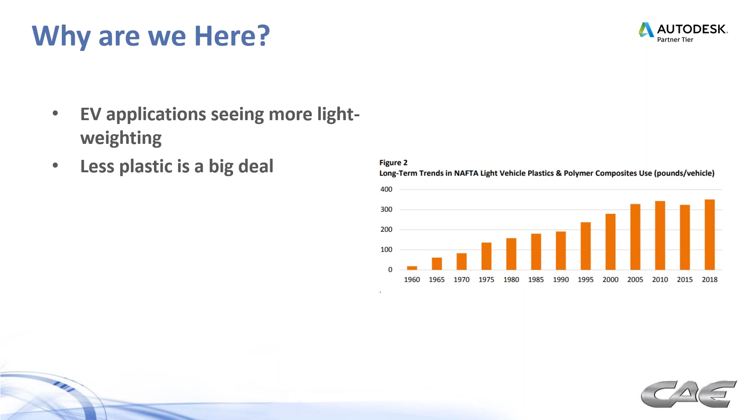You can see the chart there. Over the years, the gradual conversion from steel to plastic has taken place to get a lot of the weight out of the car just by the fact that they're switching from steel to plastic. But now we're going the route of reducing the weight of the plastic components themselves. So you can kind of see a leveling out over the last 5 to 10 years of the total number of pounds of plastic in a light vehicle.

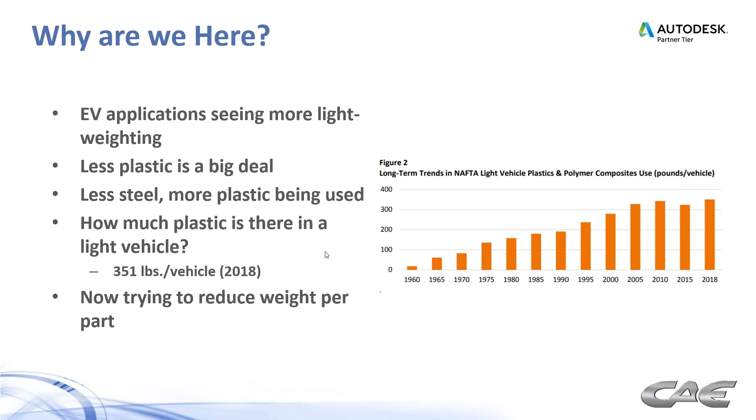But I would argue that there are a lot more plastic parts going in there, and they're being lightweighted. So the amount of plastic is leveling out, but the number of plastic parts is increasing. And so it's incumbent upon us as plastics engineers to understand what the implications of that are - how do we manufacture plastic parts, not just for the electric vehicle industry or automotive in general, but also for other types of parts as well.

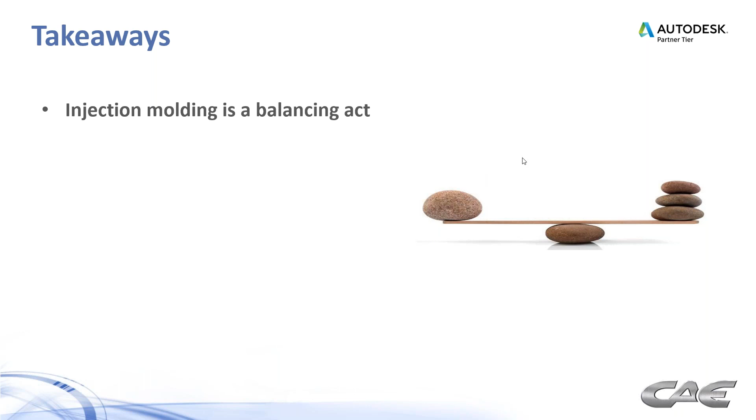So what I want you to take away today are these things here. First of all, for those of you who have been around injection molding for a while, you know injection molding is a balancing act. Whenever you try to push the envelope in one direction, there are always consequences to that. And so I'm going to point some of those things out today.

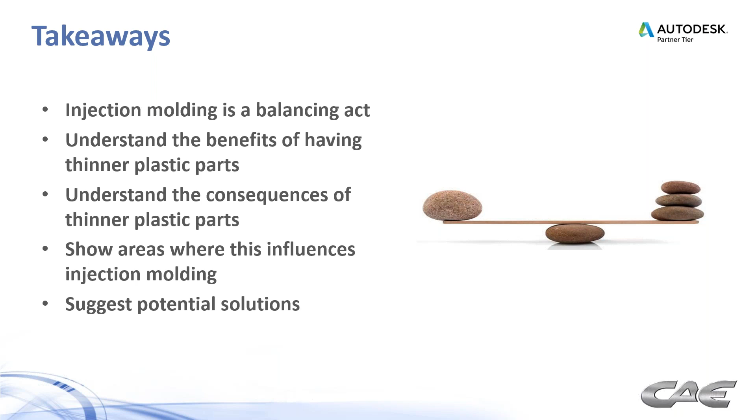So we're going to understand the benefits of having thinner plastic parts. I think some of those are pretty obvious, but we also want to understand the consequences of having thinner plastic parts. And we're going to show areas where this influences injection molding, whether it's filling, warpage, or cooling. And then we're going to suggest some potential solutions along the way for each of those areas.

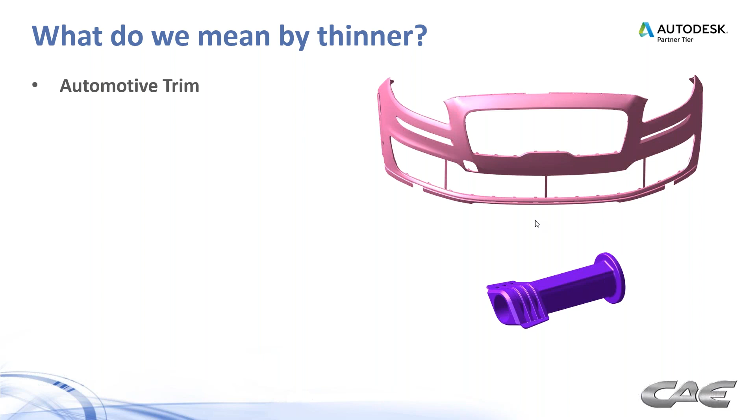So what do we mean by thinner? A lot of this depends on what type of part you're dealing with. If you're in the automotive industry, a lot of times you're dealing with big parts. So automotive trim, for example, the focus is more on efficiency and cost - you want to be able to mold parts faster, you want to reduce the amount of plastic you're using and get the cost out of these parts.

So, 10 to 15 years ago, 3 to 3.3 millimeter walls were typical for these types of parts. 5 to 10 years ago, the reduction process started, to 2.8 to 3.0 millimeters pretty typical. And now we're seeing a lot more 2.5 millimeter wall parts, for example. So the trend has been coming down, as I mentioned, with the amount of plastic that is in each light vehicle.

So again, there's going to be some consequences of getting to these thinner walls. But it's not just automotive that uses thin walls. Medical electronic packaging has been using thin walls for quite some time.

Their focus isn't so much on efficiency and cost because their parts are so small. This part on the right, for example, is only 1.5 inches long, and there's a membrane in there that's extremely thin, like 0.2 millimeters. So the focus here is more on functionality—anything goes, really.

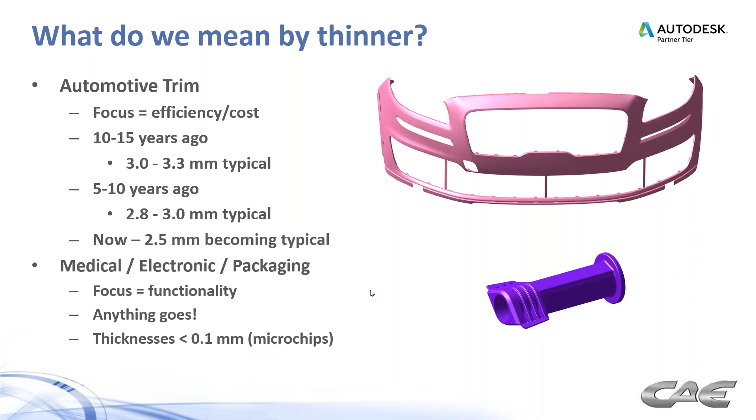It's really what matters to the functionality of the part. In some cases, we're seeing thicknesses on microchips less than 1/10 of a millimeter. They need that functionality to make their part work the way they want it to, so we have to figure out the manufacturing solution in terms of how to get it filled, how to make it work.

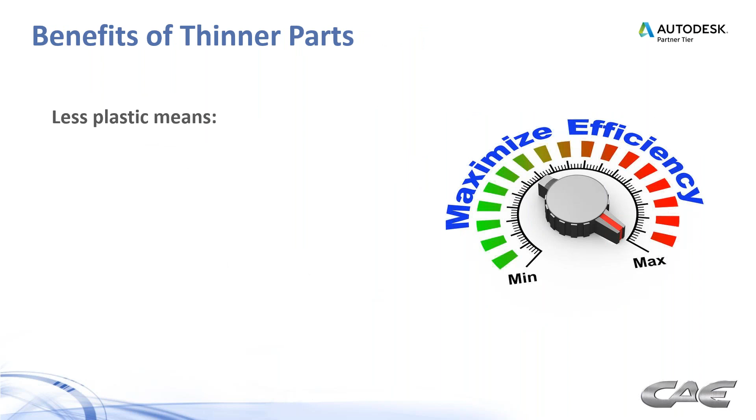And then, the benefits of having thinner parts are fairly obvious. Less plastic means reduced weight for engine efficiency, for example, and reduced energy consumption—whether it's gas on a standard combustion engine automobile, or for a fully electric vehicle, the battery efficiency. And then converting that battery energy into horsepower for the engine is important.

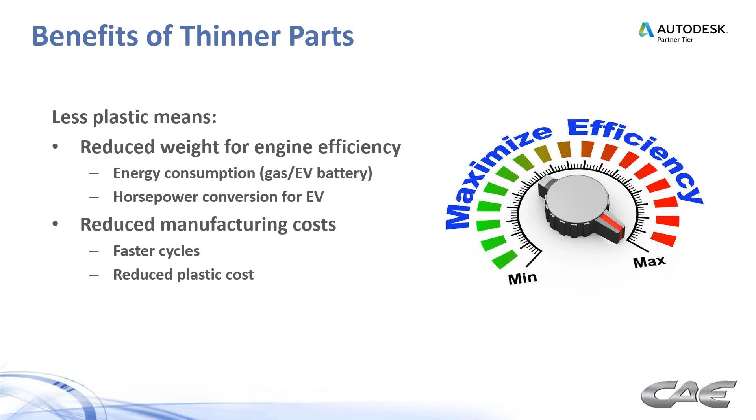And then, of course, we have reduced manufacturing costs. We have faster cycles, and reduced plastic costs in general.

But on the opposite side, plastics injection molding is a balancing act. There's a danger to going too thin with plastic, and in some cases, if you're not paying attention to what you're doing, you can get on thin ice with your boss or your company. I've seen some disasters out there that were the consequence of going too thin on a part.

So thin wall means part quality issues. You could have backfills or non-fills. You could have read-through, meaning sink marks on a show surface, for example. You could have warpage or buckling. You could have reduced part performance—thinner walls aren't as stiff, and they don't hold as much load.

You could have increased molded-in stress, which could decrease the plastic material properties that you assumed were there when you looked at the material data sheet. And of course, on the opposite side, you could have increased manufacturing costs.

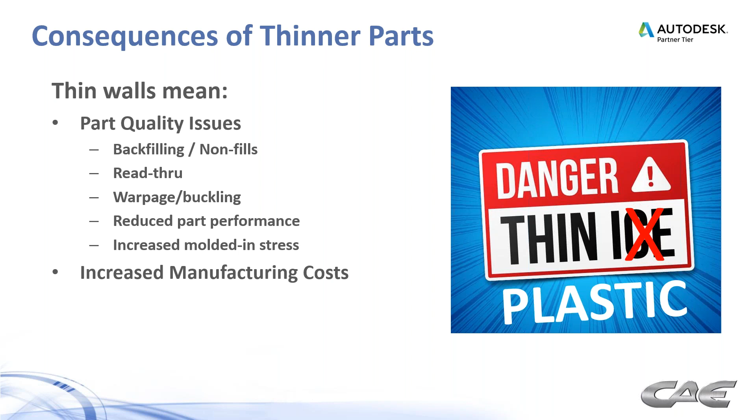It seems too simple that a reduced amount of plastic will reduce manufacturing costs from a cycle time standpoint and a less-plastic standpoint. But there are increased manufacturing costs that often go unseen, like larger molding machines. You have a thinner wall, you might have to put this in a larger molding machine to be able to hold the clamp force.

You might have a more expensive mold to build, more hot drops, for example. If you've got a valve-gated mold with a bunch of hot drops in it, every one of those drops is going to cost you thousands upon thousands of dollars. So it's a balancing act.

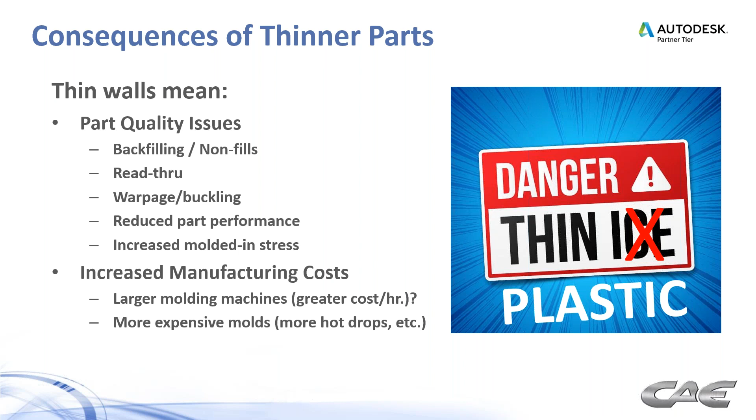So our motto here at CAE Services is predict, identify, and solve using Moldflow software.

This was a case we worked on a few years ago that was shaping up to be a bit of a disaster. I took a picture of one of these outside the window of my car one time traveling down the highway—this is a mud flap on a tractor trailer. The backstory is that some injection molding machines were purchased, millions of dollars invested for these large parts, and the first molds, or first parts off the mold, were showing a very buckled situation in that top piece there.

We'll get into this a little bit later, but they wanted a thinner wall on this top piece, and didn't consider the implications of doing that on the manufacturing side. So the customer was getting ready to pull these molds and send them elsewhere to solve the problem. But it really wasn't a molding problem so much as a part design problem. So we leveraged our knowledge in buckling and the Moldflow software to solve this problem, and we'll show that a little bit later.

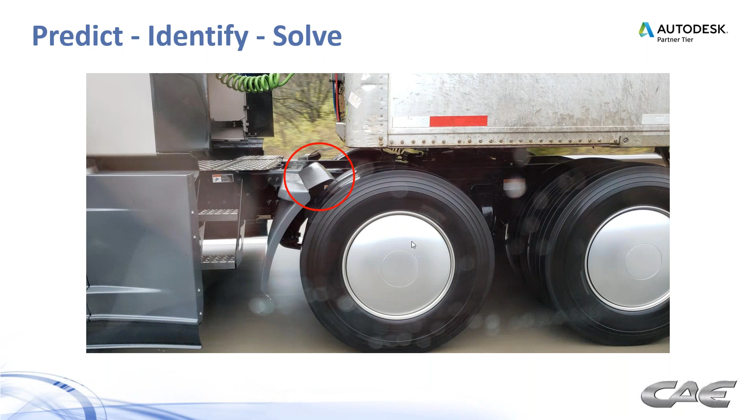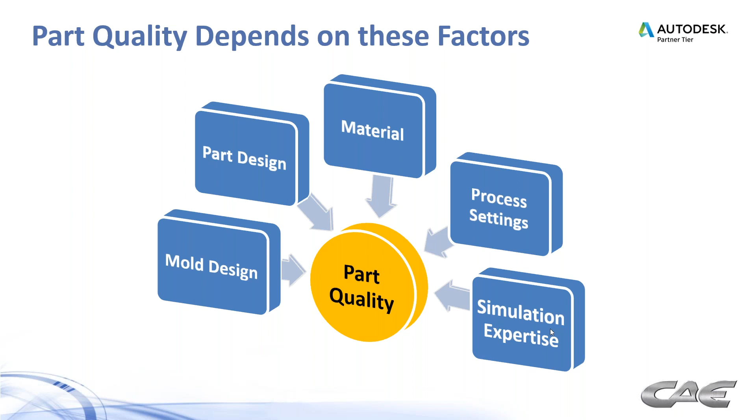So it's really a part quality issue, and in some previous webinars I've done, I approached it from a five-pronged standpoint. All of these things go into determining the part quality: the mold design, the part design, the material, the process settings, and—when we're trying to be predictive of part quality—the simulation expertise on the Moldflow side.

So we're going to get into almost a random list of things involved in thin wall applications and what we need to pay attention to. First thing we're going to get into is filling speed. This is a medical application, and they call this a cannula.

You'll see here in a second that with that thin wall, oftentimes you can get into a situation where you have an air trap. This is a thick wall versus thin wall deal, where plastic wants to go into the thicker walls, and meanwhile it hesitates as it goes into the thin wall. So what you end up with oftentimes is a backfilling condition, as we're seeing here, and also a knit line situation, which can compromise the integrity of the part. If you look at this particular piece, you see a sharp point on the end—it had to puncture another piece—and if the knit line and backfilling occur, that can compromise the structural integrity of that little cannula.

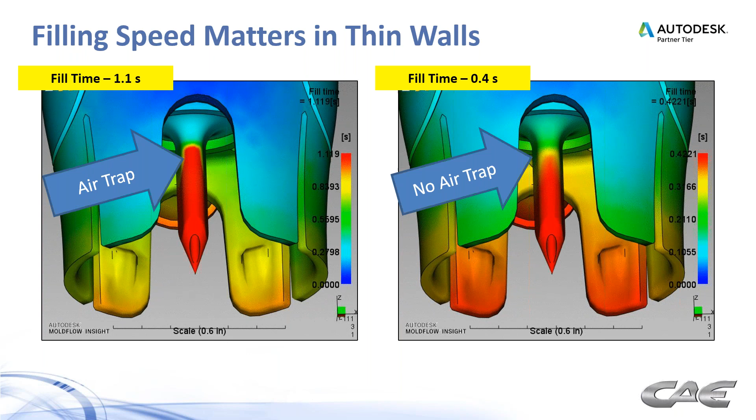One of the solutions to doing that is looking at your fill speeds. With a quicker fill speed on the right, we were able to help mitigate that a little bit. But ultimately, a better choice would have been a thicker design. We're here to talk about how to make things thinner, but sometimes, for functionality's sake, you have to find out where you can draw the line. In this case, a thicker cannula might have been a better solution, but oftentimes we can get through this by changing the process—in this case, it was a fill speed issue.

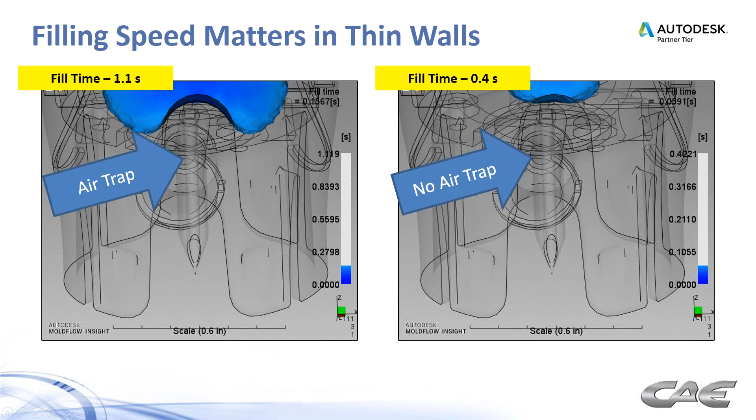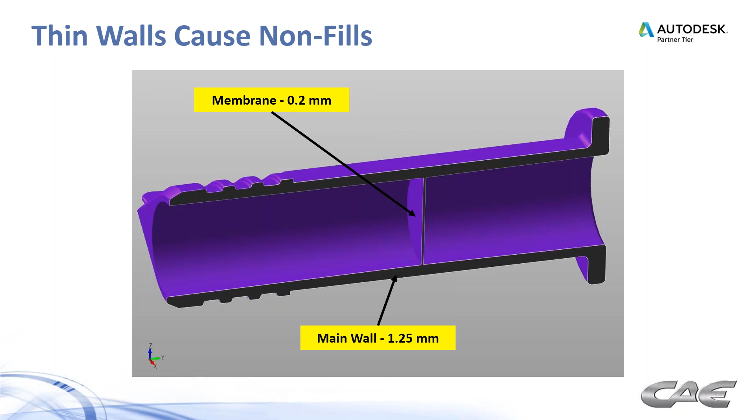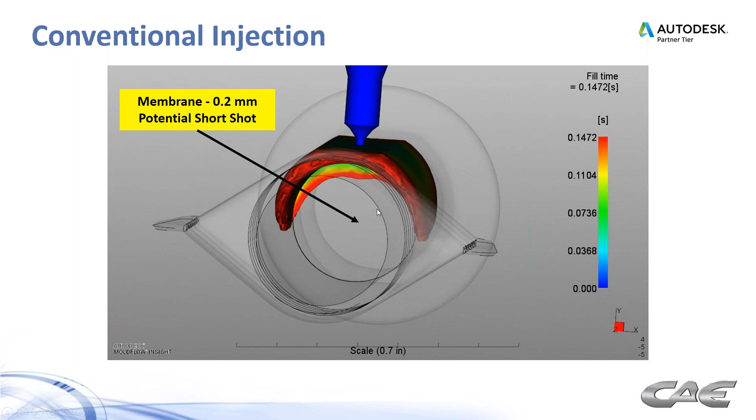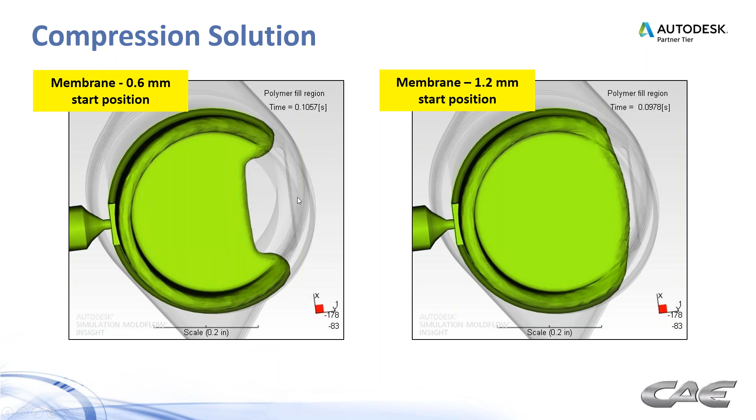So we came up with a different solution, and this was actually kind of unique in the sense that we're using compression on this. What we did is we actually pulled back the core to make its starting position thicker, and we iterated on that—we did one with a 0.6 millimeter start position and a 1.2 millimeter start position, to allow that material to shoot through the membrane without backfilling or knit lines. You'll see in a second this core will start to move. We actually have the ability to simulate that movement of the core, fill it first, and then compress it in a very short period of time so that area doesn't freeze off quickly and end up with that 0.2 millimeter membrane. A very, very unique way to achieve thinner walls. The total time to do all that, inject and compress, was on the order of 0.6 seconds.

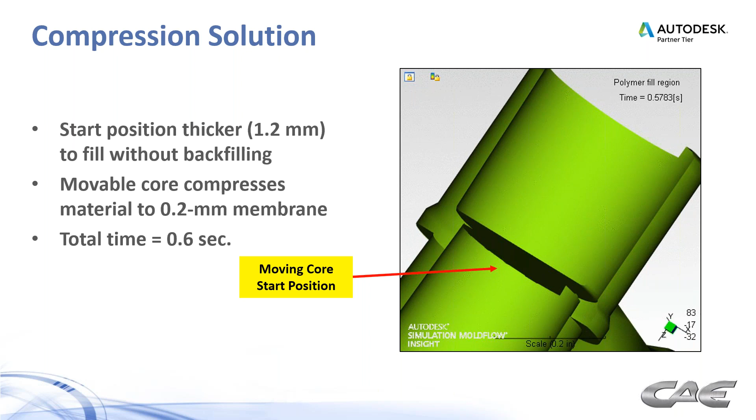One of the things you have to pay attention to when dealing with thin walls is material degradation. On this same part, if we had gone with conventional injection and were able to fill it, you see the elevated levels of stress caused by the injection process in conjunction with the thinner walls. So thinner walls means a higher amount of molded-in stress, and when you have a higher amount of molded-in stress, that's telling you the manufacturing process is affecting the part quality—it's affecting the assumptions made about material properties when you look at a material data sheet, for example.

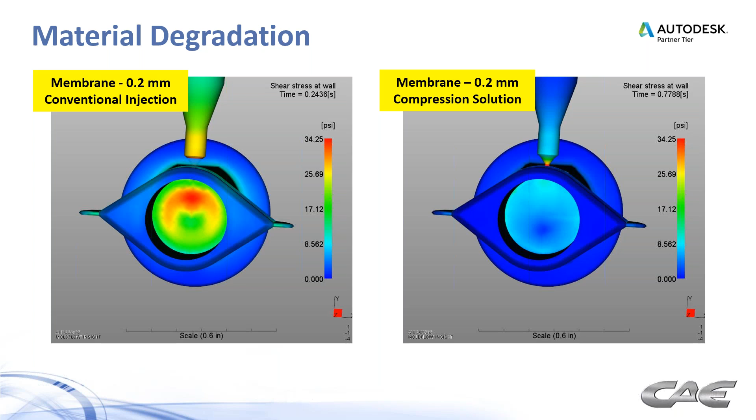This molded-in stress can actually reduce the amount of yield stress required to make a part fail in its functionality. Notice the difference here between the conventional injection and the compression solution—on the same scale, there's quite a reduction in the amount of molded-in stress in that part. It's not just this type of part; you see it in automotive parts as well. The thinner you get, especially with more amorphous type materials, the higher that molded-in stress goes. And if that part has to hold some sort of load, you may end up with quicker failure—not just because it's thinner, but also because there's a larger amount of molded-in stress there.

Okay, so that's thin walls as far as filling patterns is concerned.

Now we're going to talk about the number of gates and how it relates to pressure. Here's a bolster part that we worked on, and on the left we have a 3 millimeter wall with 3 gates. Not the best balance in the world, but it's a workable solution. 14,300 psi to fill that.

When we reduce that to 2.5 millimeter wall and using the same gating option, now our pressures are increased up to 17,000. And if we were to push that even further, now you're starting to get up close to the capabilities of the machine. 20 to 25,000 psi is pretty typical for an injection molding machine.

So with the 3 millimeter wall, with 4 gates, we were able to get it down to 12,000 psi. So this is where adding a gate gets you into a larger molding window, but now you've got the consequence of an extra gate, so that's going to cost some additional dollars in your mold design.

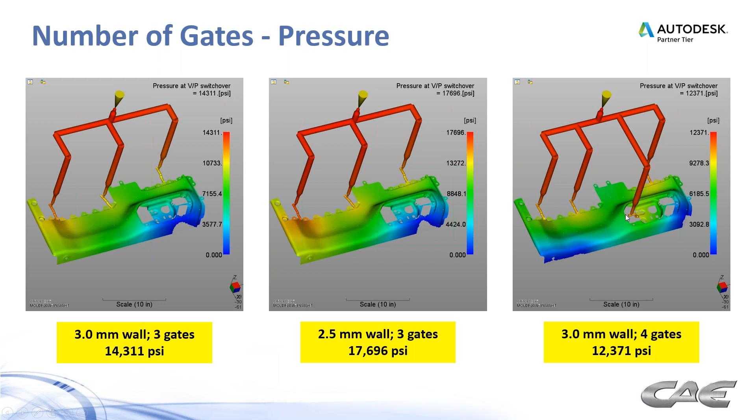Not only that, but you have to pay attention to what's going on with clamp force. So with those same 3 situations, the 3 millimeter wall with 3 gates is 1,700 tons, the 2.5 millimeter wall with 3 gates, now we're up at 2,400 tons.

So let's say you're slating this part to go into a 2,000 ton press. Well, now all of a sudden you reduce the wall thickness so much that you can't mold it in that 2,000 ton press. You have to go with a 2,500 ton press if you're going to stay with the 3 gate situation. But going to the 4 gates, we're able to get it back down to almost 1,600 tons.

So clamp force is affected because the pressure is affected. Pressure is affected because of the gating scheme. So all of these things are interconnected, and all of these things are potential problems if you're not able to simulate this ahead of time and see what you're up against.

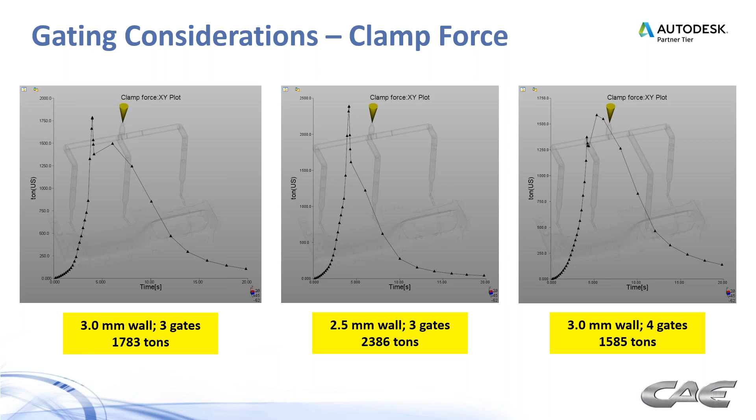Here's a chart. I did a little DOE on this part, looking at on the x-axis 5%, 15, 25, and 35% increases in wall thickness from nominal, and then down to 25% less. So you see from nominal, as you go thinner and thinner, we have an exponential increase in pressure with the thickness. It doesn't take long before this pressure starts to get out of hand.

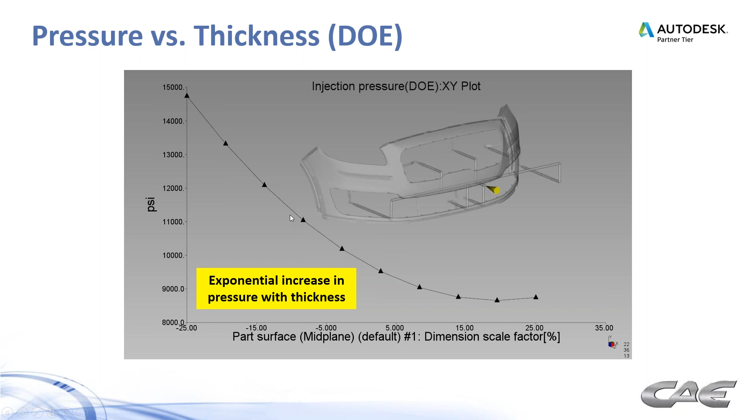Now this is a large part with a TPO type material, so pressures are generally fairly manageable. But imagine a material that's a little harder to fill. That pressure can get out of hand real quick, like polycarbonates, PC-ABS, things like that. So exponential increase in pressure with a decrease in thickness is the big message there.

On the cooling side of things, we tend to have a linear decrease in temperature with the thickness. So as those thicknesses come down, this is where we see benefits, right? And it tends to come down linearly.

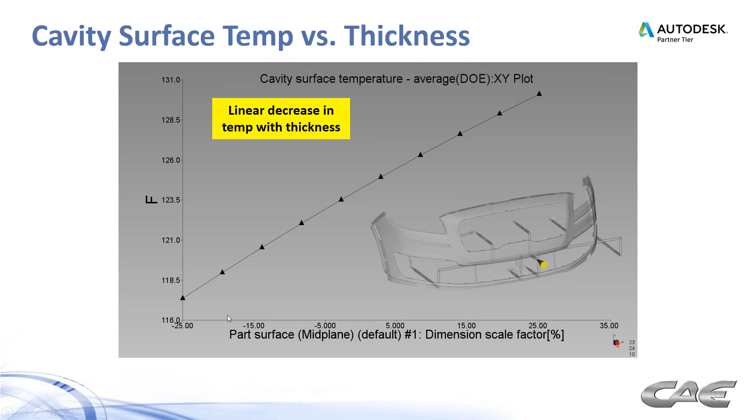And then what I found over the years is about for every degree in temperature that we reduce something, it equates to roughly about a second saving in cycle time. So that's how to look at this. So notice when we go down to like a 15% decrease in the wall thickness, we might be saving up to 5, 6, 7 degrees in temperature, which is going to equate to that 7-second cycle improvement.

To be more specific, we look directly at some of the temperatures. Now, on that previous plot, that was cavity surface temperature. This is an average temperature, and we tend to look more at average temperatures when we're deciding where to end our cycle. On the left here, we have a 3.3 millimeter wall, with 39 seconds IPC, meaning injection plus packing plus cooling. On the middle one there, we have 2.8 millimeter wall, and that reduced it by 9 seconds. And then on the 2.5 millimeter wall, we're at 25 seconds, just to get everything to the same temperature.

So again, this is where simulation comes in. We're able to see what the benefits are of going to the 2.5 millimeter wall.

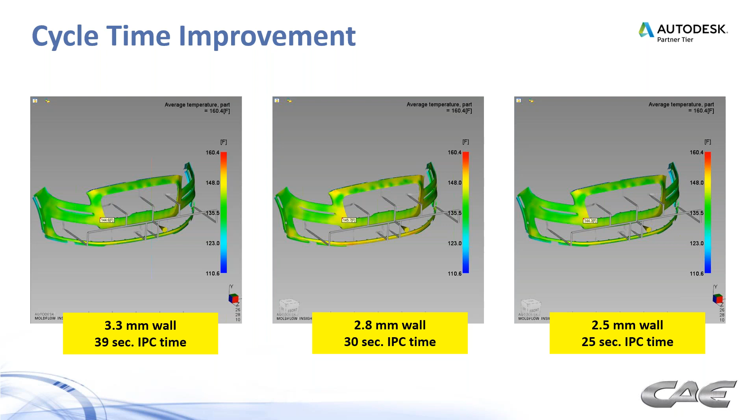Part design issues. In previous webinars, I've shown that part design or warpage is a very shrinkage related issue, and it's shrinkage related in 2 ways. Number one, we've got pressure issues with the gating. Areas with high pressure tend to see low shrinkage, and areas with low pressure tend to see high shrinkage. So our gating scheme matters in terms of how the shrinkage plays out.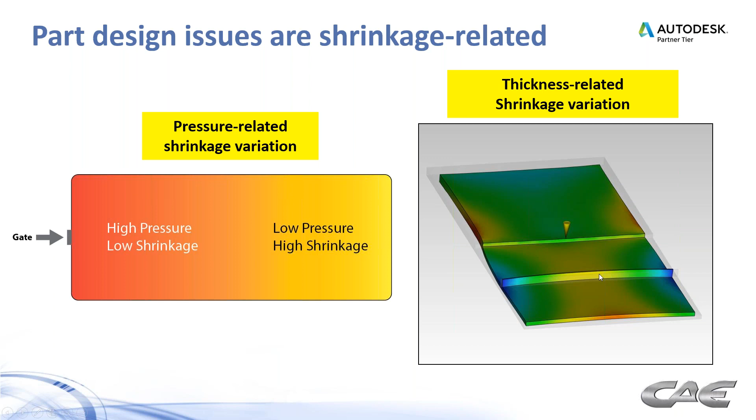So what may be stated on a material data sheet for shrinkage may not apply when you change this part design. Those data sheet numbers are generated under very controlled conditions, with test plaques at a certain wall thickness, and those shrinkage numbers are generated from that. So this matters when you start changing the part design, especially the thickness. Your shrinkages change, and then your assumptions about what you cut into the steel need to change along with that.

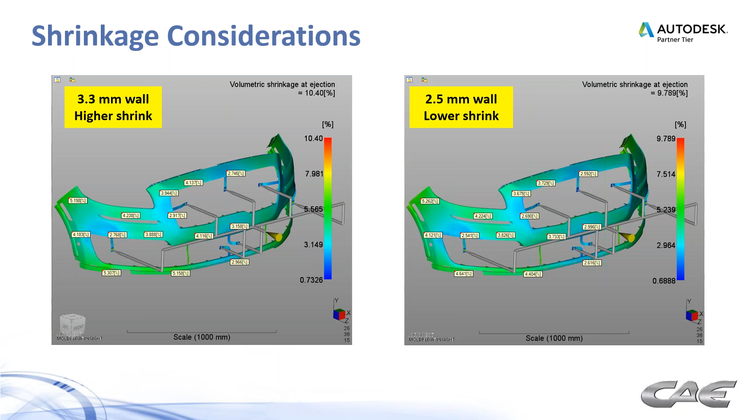So you're going to have to start reducing the thickness of the attached features accordingly. And as we mentioned before, now we start reducing thicknesses, we've got to start thinking about non-fills, short shots, those kinds of things. Maybe performance issues too—thinner walls here may compromise the integrity of that boss as it attaches to some other feature.

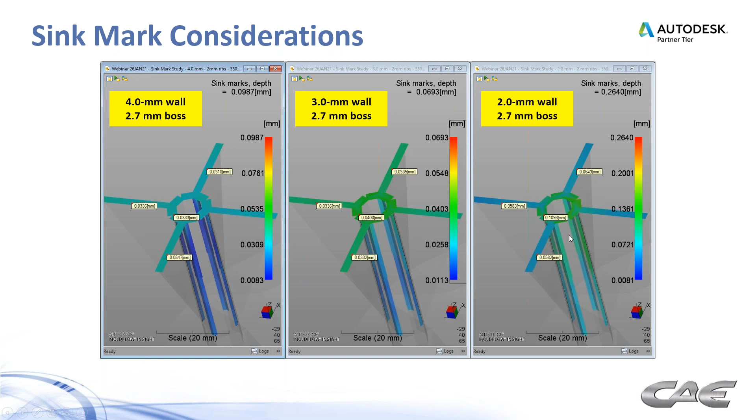This is one of these areas in Moldflow that is not very well understood—I shouldn't say not well understood, but not often used. You know, standard Moldflow, if you're not paying attention to buckling, you can get some very wrong answers in terms of the predictions for your molded part. So buckling is really important to pay attention to, especially when you're going thinner and thinner. And you can see this on this particular part, Moldflow picked it up very well.

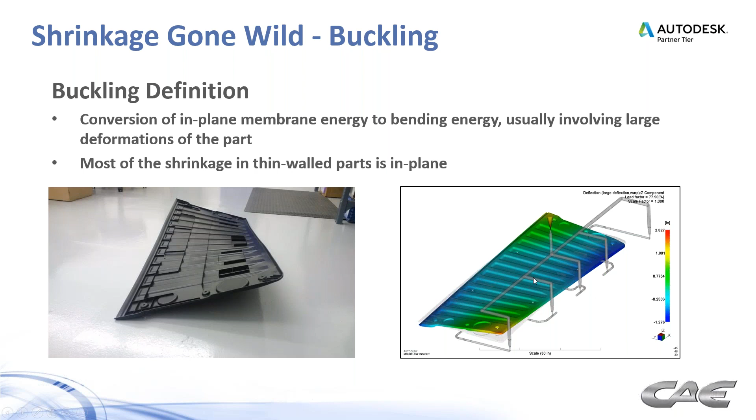So what are some of the remedies for buckling? You can stiffen the part by adding ribbing, or create stiffening features like corrugated surfaces, things like that. And one of the things we found is sometimes it's an increase in thickness. We're all about thinning walls out, but at some point you have to find the minimum thickness you can go to before things start buckling.

Sometimes it's a change in material. That's a more difficult thing to do. Typically you're so far along in a project that the material is the material that's going to be used, and that's that. But I have seen cases where parts have buckled, and we've changed the material to get rid of that buckling, and that was acceptable.

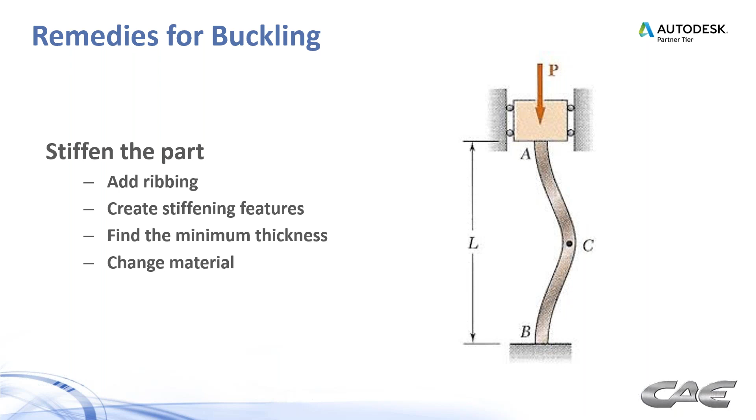But this is one of those cases where you would have to do this very early on in a project, and this is what we preach all the time, right? Do Moldflow early. If you're doing Moldflow early, you can catch these problems, and you have a lot more solutions open to you to fix a problem than you do when you're getting ready to cut steel on the mold, for example.

So I mentioned that truck part earlier, the tractor trailer. This is how we did it. We thickened it, you know.

At first when we mentioned that solution, they said no way, this is the way we want it designed, that's that, make it work. Well, we tried stiffening it up by other features. We added ribbing, we did a bunch of different ribbing patterns and so forth. But ultimately, it took thickening that wall to fix the problem.

They didn't want this big dimple in the middle of their part. And it's amazing how the simulation was able to convince people to make a solution that worked. They would have gone down the road of pulling these molds, sending them to somebody else, and that molder would have had the same problem. It wasn't a molding issue, it was a part design issue.

Then another thing that might be coming into your head here is, should I use windage? We've done webinars on windage before. So for those who don't know what windage is, it's basically biasing the tool steel in the opposite direction of the expected warpage, expecting that warpage to come back to flat.

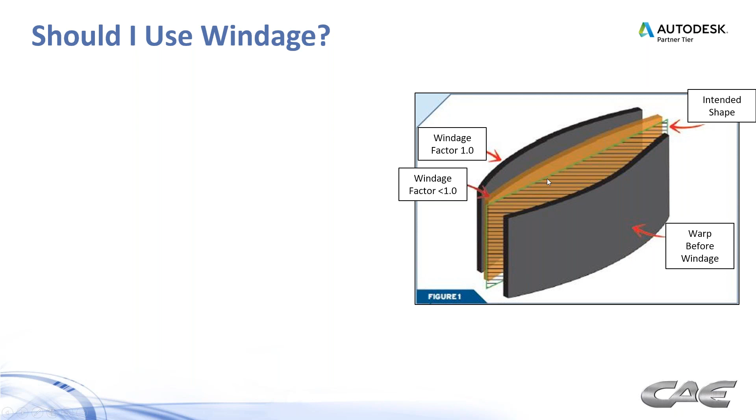And we talked about when to use it, using it when tolerances are reasonable. For example, if you have a tolerance of 0.1 millimeter on a bumper fascia, that's a tough sell when it comes to changing your mold with windage to reach that kind of tolerance.

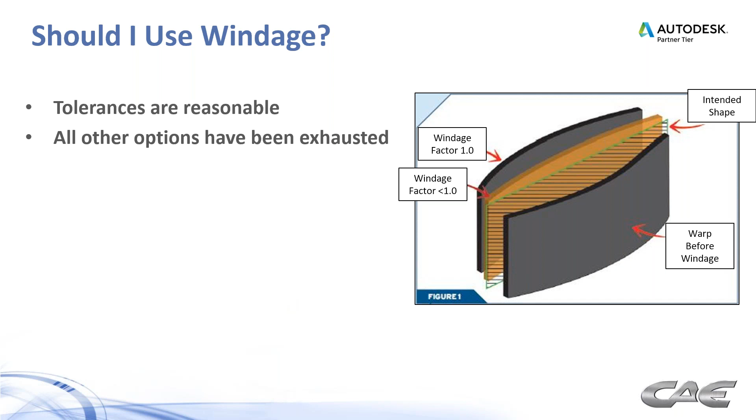It should be used when all other options have been exhausted. When we've changed the gate locations, tried some part design changes, tried running it in a larger molding machine or changing the cooling or whatever. When you can't fix the warpage through all of these other methods, then oftentimes we rely on a windage solution. And that's something that we at CAE here have gotten very good at.

But windage and buckling do not mix. So when we get into these buckling situations, this is the reason we don't want to do it. Buckling is inherently unstable. Small changes to anything in this mold or part design or process or whatever lead to large changes to the warpage.

Imagine this guy on the tightrope. That's essentially what you're doing when you're in a buckling situation. You're on a tightrope, and any small movement to the right or left is going to produce disaster. It's going to produce a large deflection there for that guy.

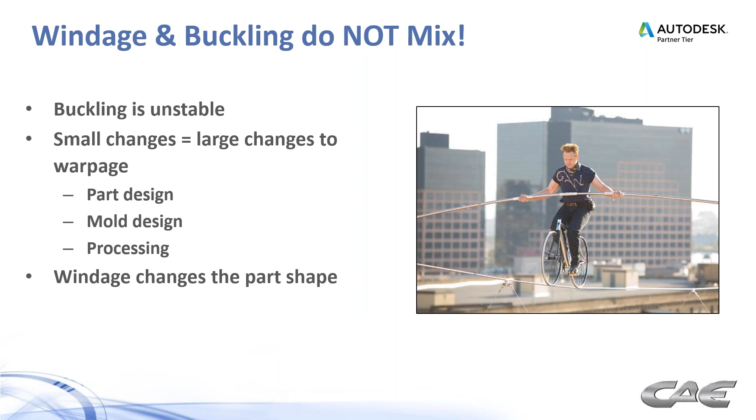So buckling is not a good idea, or rather windage is not a good idea when it comes to buckling. Because windage essentially changes the part shape as it sits in the mold. So if we are going to use windage, we need to stabilize the part first, and we're going to use Moldflow to do that.

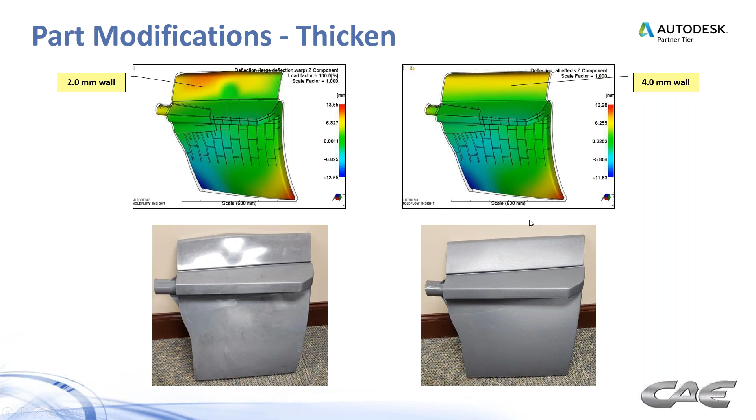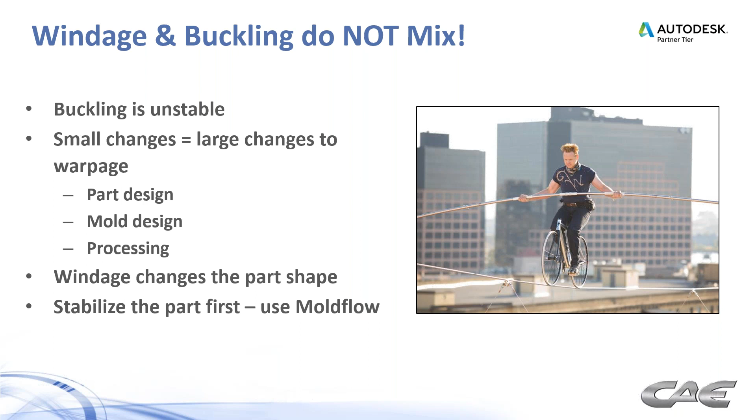But if they needed to correct that, that might have been a windage solution. We stabilized the buckling, but now there's still some warpage left to take care of. So that's the main point with buckling parts - you've got to stabilize the part first before you get to the windage solution.

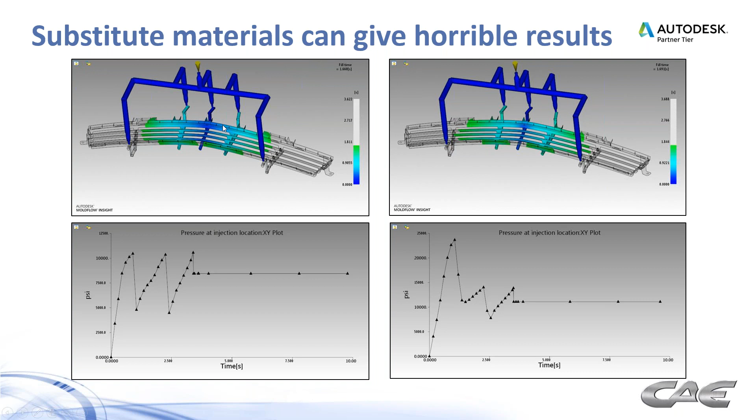I preach this in just about everything I do, Moldflow wise, but make sure that any materials that you're using are well characterized before they're being simulated on your mold. In this case, we're showing the exact same setup in two cases. In one case, we have material without juncture loss data. In the other case, we have it with juncture loss data. And you can see the difference in the pressure predictions, okay?

And this is just in a standard part. If you go to thin parts, this becomes amplified pretty quickly. Remember, the pressure increases exponentially as you try to reduce wall thickness. So if you're simulating materials that are not well characterized and you're trying to make a decision on whether or not you can mold this thin wall part, you better be very careful with how you substitute materials. Make sure you have good, well characterized materials.

And then with the buckling situation as well, these pressures matter when it comes to predicting shrinkage. If you predict pressures well, you predict shrinkage well. If you predict shrinkage well, you predict warpage well. If you predict warpage well, then you're going to detect buckling from time to time, and you want to make sure you got that answer right.

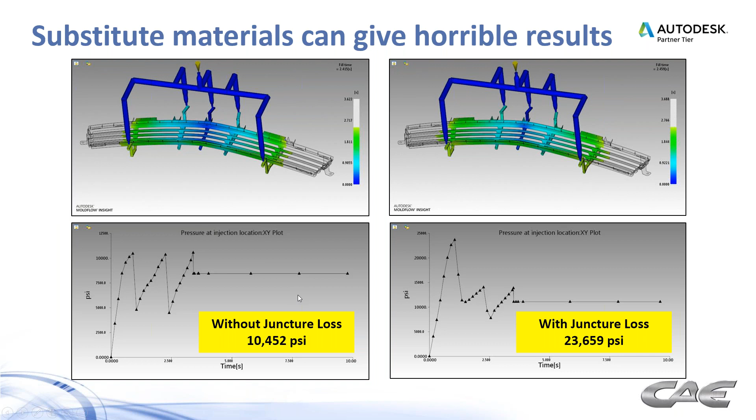Everybody wants me to answer the question, how thin is too thin? And I'm going to give the cop-out answer. The answer is it depends.

You have to ask these questions. Will it compromise the part functionality? A lot of people do structural analysis on their parts to make sure, if this is a load-bearing part, that it's going to still be able to withstand the loads with a thinner part. Understand that when you're doing structural analysis, you're doing it with perfect material properties. You have to understand that when you manufacture a part, the manufacturing process itself affects the mechanical properties of a plastic material.

Second question: is it causing backfilling or non-fill issues? We showed a couple of examples where that becomes an issue. If you're going too thin and molding that alongside thick walls, you're going to have some backfilling issues sooner or later.

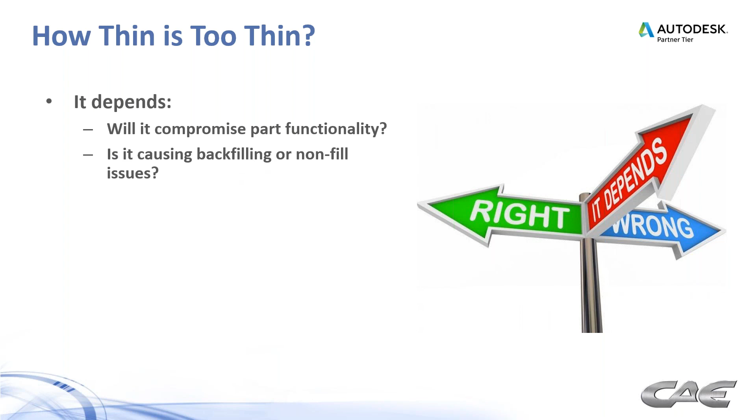So can we fix this with a gating solution? Can we fix it with a processing solution? With these thin walls, you're inherently going to have a tighter molding window, so the options available to you in terms of process are going to be fewer and fewer when you go thinner and thinner. You've got to know these things ahead of time before you get into it. So, is it causing a backfilling or non-fill issue? Can we process that out, or can we institute a gating solution?

Is there too much pressure or clamp force required to fill this? You don't want to get this to the press and find out you can't fill this part because you don't have enough pressure or clamp force available to you.

Will it cause ejection issues? Do you have a large part that's now so thin you can't eject on it? Will my part buckle? We talked about buckling and what that means to your part. Is my warpage excessive?

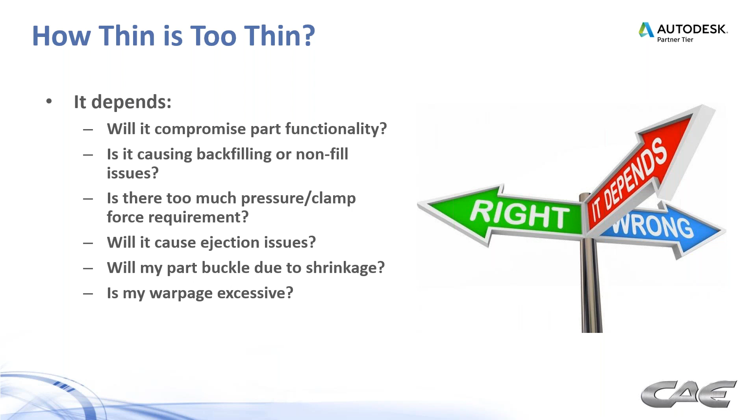So how thin is too thin? Good question, and it's one that everybody's going to wrestle with. But I can tell you unequivocally, the only way you're going to know how thin is too thin is if you simulate this ahead of time.

Use Moldflow to go thin to win here. Leveraging Moldflow is going to help you avoid the pitfalls of guessing wrong. Guessing wrong is going to cost you time and money, and in some cases, I've seen it happen, you're going to build new molds because of it. And that's a very expensive solution.

It's going to help you determine where that line should be drawn and reduce the guesswork. It's going to help you determine solid solutions, ones that don't involve building a new mold, for example.

So in the part design area, we talked about thickening walls, or in some cases maybe making them more uniform when it's a filling issue. Maybe we need to add ribbing or structural features. Maybe we need to change the process—faster fill, larger molding machine.

Every case is different. I get asked all the time, is there a rule of thumb, like the length-to-thickness ratio in terms of how far we can fill and so forth? Every material, every part design, every mold design—there are millions of combinations out there, and every situation is different. So it's hard to put a rule of thumb on these things because there really isn't any standard rule of thumb for these situations.

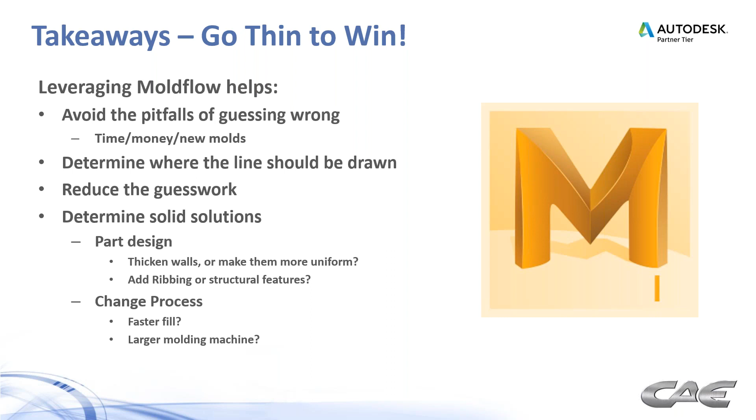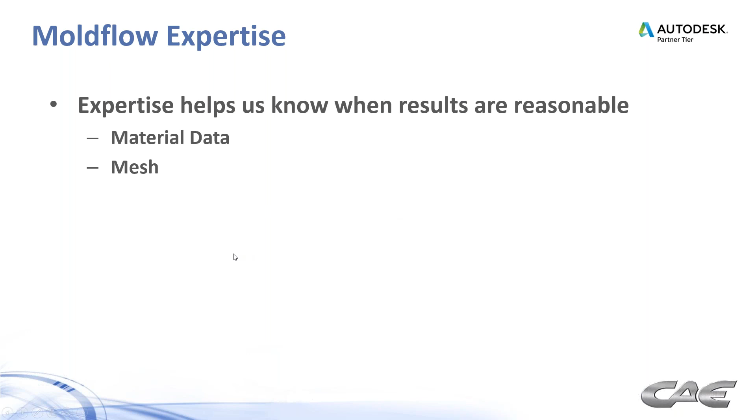And of course, if you're going to simulate, you better make sure the people doing the simulation are experts at it. Make sure they know when the results are reasonable, when the material data is good, when the mesh is good, know how to move gates, know how to process, know how to change a part design, know how to use windage to fix warpage. All of these things go into determining solutions.

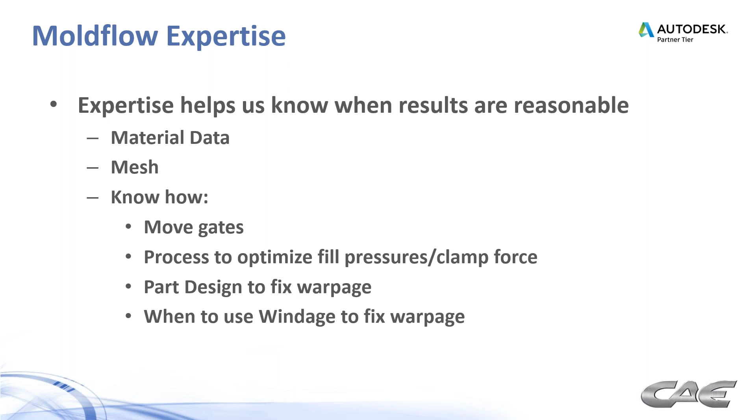I mentioned the buckling situation previously. Knowing what that means, how to detect it, and what type of mesh to use to detect buckling before it occurs is really important.